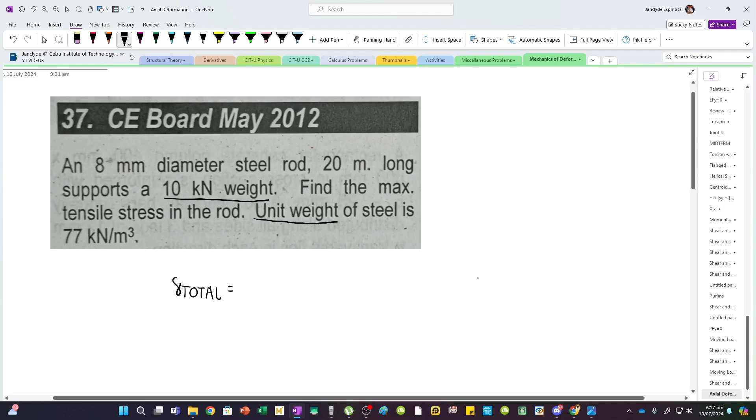Now, paano i-solve tong problem na to? Yung naging mahirap dito is, binigyan tayo ng unit weight, aside from the applied weight or applied load. Therefore, we have to apply integration. Now, explain ko yan mamaya. Now first, we have to solve the total deformation. Yan. Now, diba, the total deformation is, yung formula natin for axial deformation is PL over AE.

But we have two loads that will cause axial deformation. First, we have the applied load, and then you also have a deformation caused by the self-weight. Therefore, we have PL over AE for the self-weight. Yan. Now, for the applied load, madali lang. Kasi we're given the load and then we'll just apply PL over AE.

So we have here, the load is 10 kN and then the length is 20. Diba, this is together kilonewton saka meter. Therefore, we have to multiply this by 1000 squared para maging Newton mm, so that it will be consistent with our units for the modulus of elasticity saka yung area ng steel rod. So divide natin to by pi over 4 times 8 squared, and then multiply natin by E, which is 200 GPa, convert to MPa, multiply by 1000.

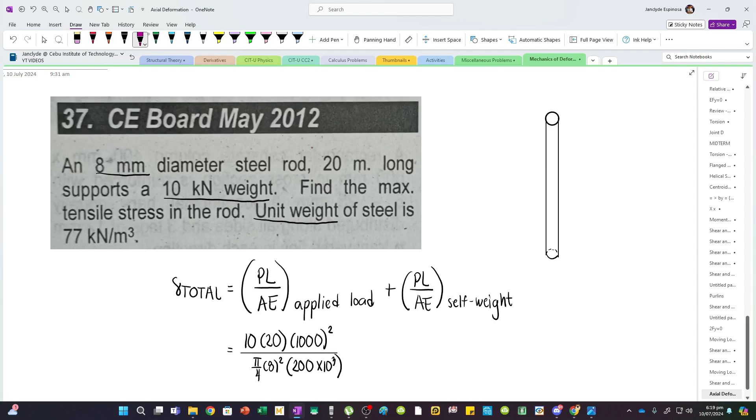Now, ito yung figure natin. Draw natin yan. Yan. Parang ganito yung figure natin. And then, yung diameter daw ng rod is 8 mm. And then, yung length niya is 20 meters. Yan. Now, yung mahirap dito is, for the unit weight, actually, we can't directly solve the deformation, pero meron tayong shortcut. But first, discuss muna natin yung method by integration.

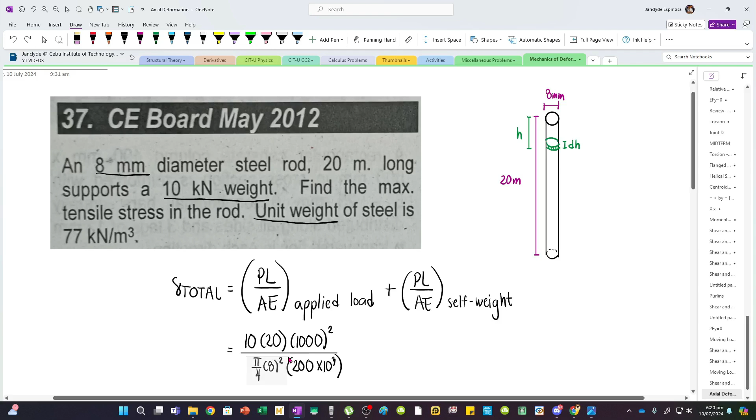So here, we'll consider a differential strip. Sabihin natin, we have this element. Yung element na yan. And then this is, sabihin natin, this is a differential height. And then, ito naman, this dimension is h. And then, ito yung cross-sectional area, which is pi over 4 times 8 squared. Now, we have to note here that the value of W at any point varies with the volume. Kasi diba, if you will only consider this portion, yan lang yung volume na i-multiply mo dito sa unit weight.

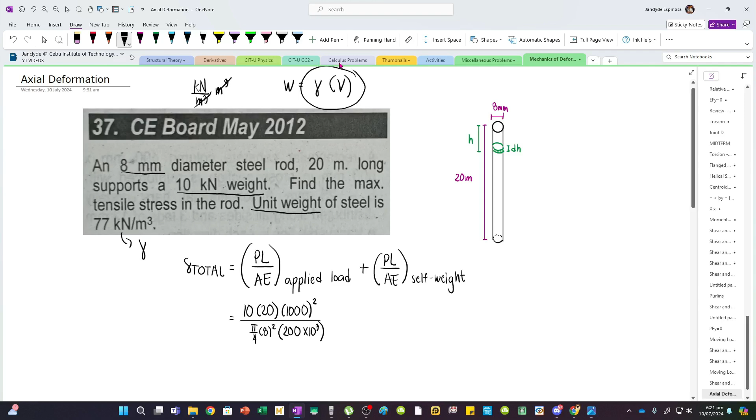But what if you will increase h, or the height? If you will increase the height, yung total weight will also increase. Bale, yung weight pala natin is, di ba, kN per m cubed. So, this is gamma. Now, weight is gamma times volume. Kasi di ba, kN per m cubed, multiply natin by m cubed, magka-cancel yung m cubed, and then we can now convert this into a force. So, ito yung mangyayari. Let's look at this differential element.

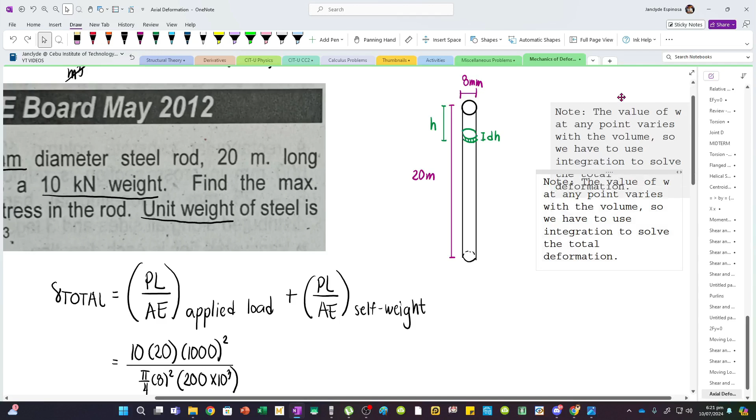So, sulat ko na lang. The value of W at any point varies with the volume. So we have to use integration to solve the total deformation. Yan. Again, kung ito lang yung volume mo, maliit yung i-multiply mo sa gamma. So, maliit yung weight. But if itong buo na, mas lalaki yung weight mo. So, ibig sabihin, our P actually changes with the height. So now we will consider a differential deformation. And then we have here, this is gamma, not to be confused with delta. Again, this is delta, this is gamma. Ito yung unit weight.

And then we have to integrate. Ano yung integrate natin? Let's check out this volume. Yang volume ng itong kinonsider natin. Diba, yung volume niya is area multiplied by the height, h. Yan. So, we have here, integral of area times h. Yan yung volume. But, we have to integrate from 0 to itong buong length. Sabihin natin L. We have to integrate from 0 to L.

And then we have this volume. Multiply natin yan by dH. Now again, dH accounts for itong strips. And then parang we are calculating the individual deformations of each strip so that we can get the total deformation. And then divide natin to by AE.

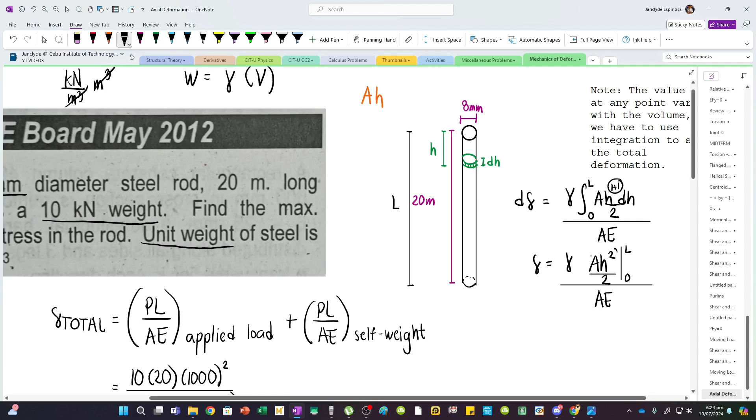Now, integrate natin both sides. Magiging deformation equals gamma. Integrate natin yung AH with respect to H. So, magiging AH squared, but we have to apply the limits of 0 to L. And then divide natin to by AE. By the way, AH squared pala divided by 2. Kasi plus 1 sa exponent ng H, di ba, magiging 2. And then divide natin by 2 if we'll integrate.

So, this is now our final equation. But we have to apply the upper limit and the lower limit. Now, since 0 yung lower limit, just apply the upper limit. So we have gamma times AL squared. Divide natin yan by 2AE. Now what can you notice? Diba, magka-cancel yung A. Now, if this cancels, then we are left with yung total deformation pala due to the self-weight is gamma L squared divided by 2E. Ito na yung shortcut formula natin.

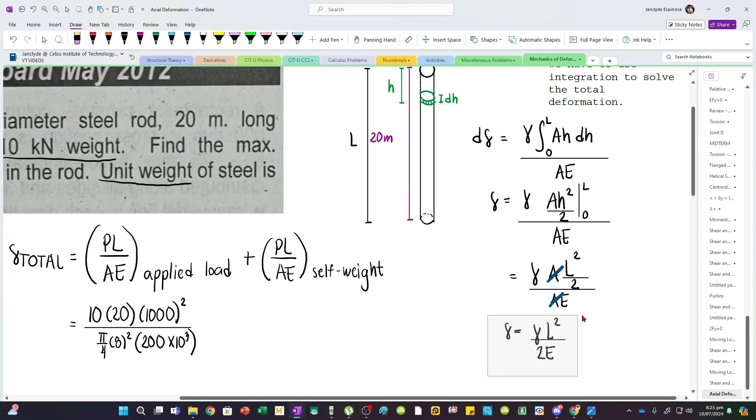By the way, meron pala tong 2. Kasi again, meron tayong 2 dito. So, para tong L squared over 2. And then 2 will carry over sa denominator. Kaya magiging gamma L squared over 2E. Or you can also use, let's try to check kung saan yung center of mass ng rod natin. Diba? Andyan lang yan sa gitna.

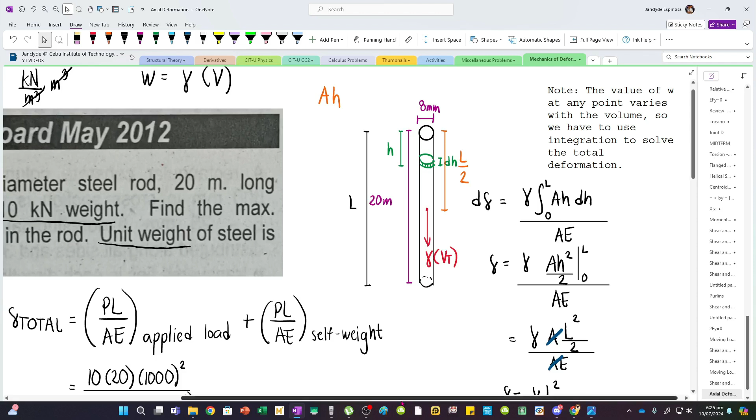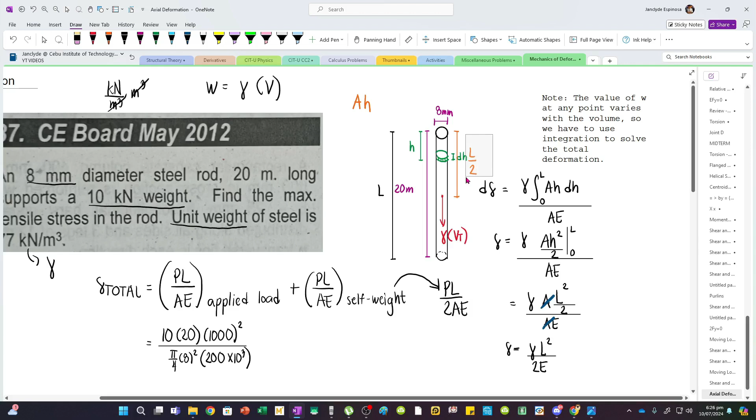So sabihin natin, this is gamma multiplied by the total volume. Now, if you will apply this one, this length is L over 2. And then yung shortcut talaga, if you are given the density and then uniform yung area, you can use PL over 2AE as the deformation due to self-weight. Parang ito lang yan, yung nangyari lang dito is nag-cancel yung area. But diba, merong 2 dyan to account for half of the length lang yung i-analyze mo.

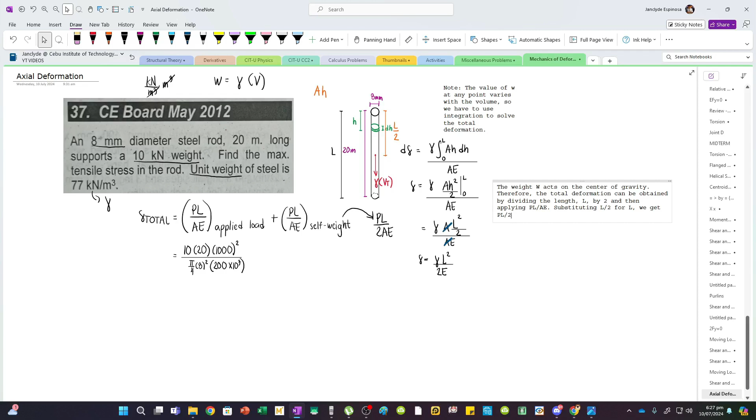So, note natin dito, the weight W acts on the center of gravity. Therefore, the total deformation can be obtained by dividing the length L by 2, and then applying PL over AE. So if L is L over 2, this now becomes PL over 2AE. Parang ganyan lang. So lagay ko na lang, substituting L over 2 for L, we get PL over 2AE. So now, this is now the total deformation due to the self-weight.

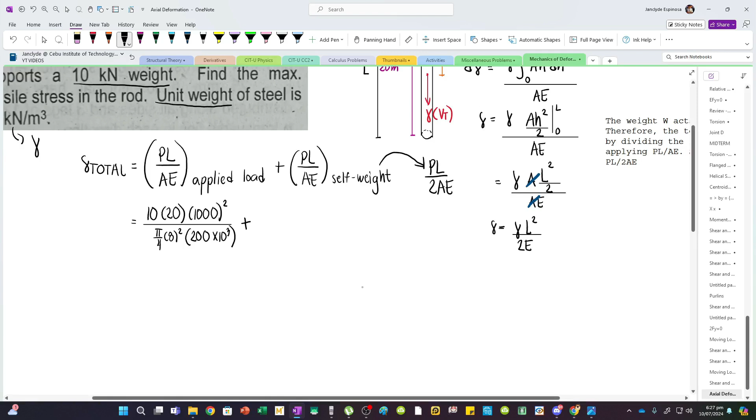So, isusulat natin, yung unit weight is 77 kN per m cube. And then, we have L squared. So, ano yung length? Yung length natin, 20 meters. And then, square natin. So, divide natin by 2 multiplied by E, which is still 200 GPa. So, convert to MPa times 1,000.

But, notice that our resulting unit will be, di ba, m cubed saka m squared magka-cancel. We are left with a unit of meters. So, that's why we have to divide this expression by 1,000 para maging mm. Kasi mm yung first deformation due to the applied load. Dapat consistent yung units. Therefore, I have to multiply this by 1 meter. Meter cube times m squared, merong m sa baba. Remove na lang natin yung units, and then we have here 1 over m. And then 1 meter is 1,000 mm.

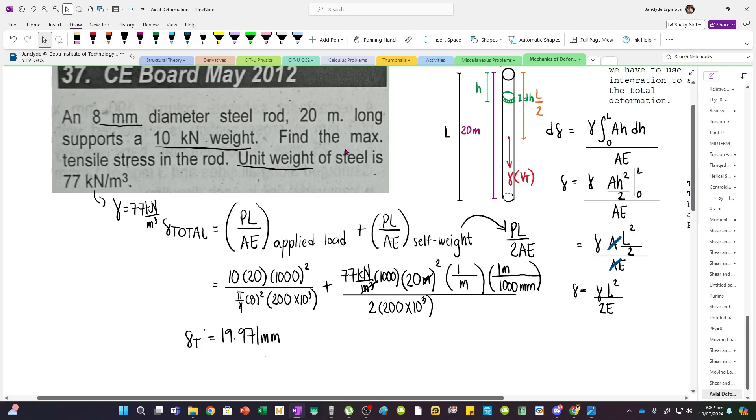But the question is the maximum tensile stress. Now for the maximum tensile stress, we need this value, and we can reduce this into a singular deformation, PL over AE, but itong P over A defines force over area, which is stress. So therefore we have 19.971 equals stress multiplied by length. Ano yung length? Diba 20 meters.

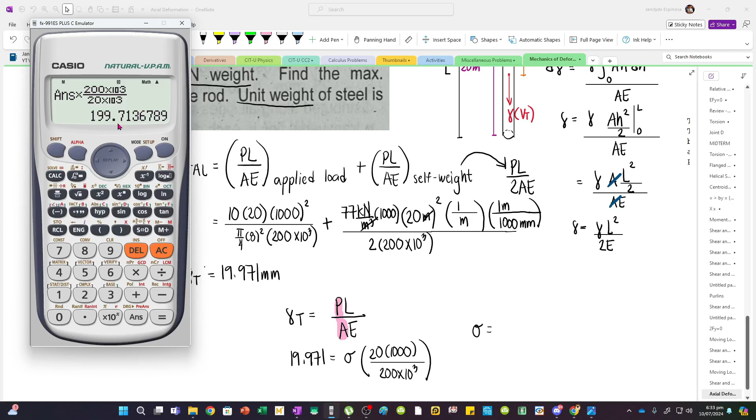Convert ko yan to mm so that it will be consistent with this value. So 20 times 1,000, divide ko yan by E, which is 200 times 10 to the 3. Now solving the stress, we have this value times 200 times 1,000 over 20 times 1,000. So we have 199.71 MPa.